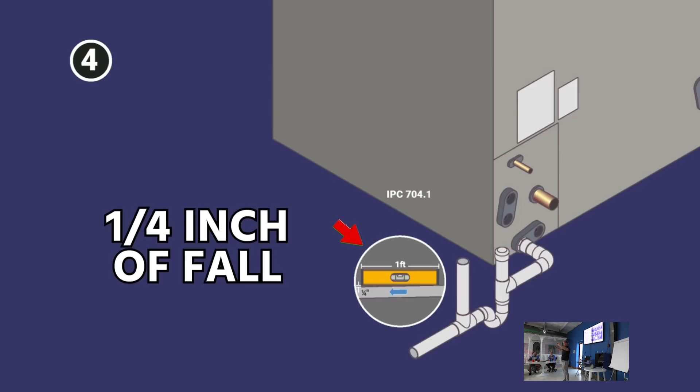Couple key points here. First of all, you need to have fall across the entire system. Everybody knows this, right? But how much fall? 1/4 inch per foot is about what you look for. Some codes in the US will say 1/8 inch per foot, but you really want to have, for every foot of run out, you want to see it drop about 1/4 inch minimum. It can be more than that.

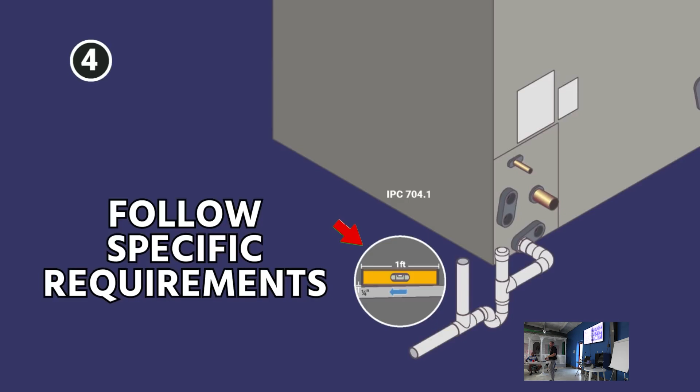Some people will talk about, oh, it could be too much. Well, that's in plumbing where you have solids. When you have solids, you could actually get too much fall where the water rushes by and the solids don't go with it. In HVAC, that's not as big of a thing because you shouldn't be crapping in the drain line. That would be a bad thing.

One of the biggest mistakes that people miss is double trapping and vents and how that all works, okay? So you want one trap and only one trap. The only time that there's an exception is if you have multiple systems going into a common drain, and then you might have more than one. You might have traps in the individual drains, and you might have one in the common drain that they connect to. That can happen. But here's a really important thing.

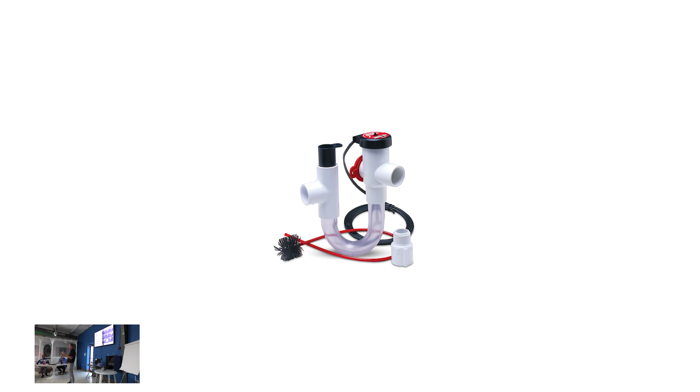Before your trap, you have a clean out. Do you guys use prefabricated traps, like EZ Traps or anything like that? Do you tend to use those? Okay, so that's built in. It's baked into the system. You got a clean out. But after that, you should really have a vent, okay?

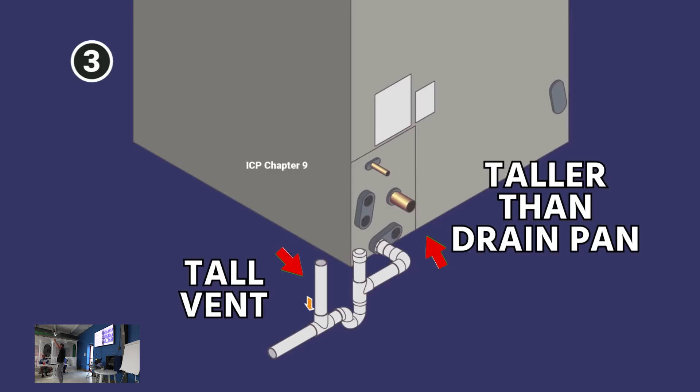And a vent is open and it stays open and it's tall enough that it gets above the drain pan, right? That's really, really important, that last part that I just said. Because if you have a vent that's not taller than the drain pan, what's going to happen when the drain backs up? It's going to overflow all over the place. If it's taller than the drain pan, it's not going to make a difference, right? And what that does is it de-risks you in case there are double traps later on.

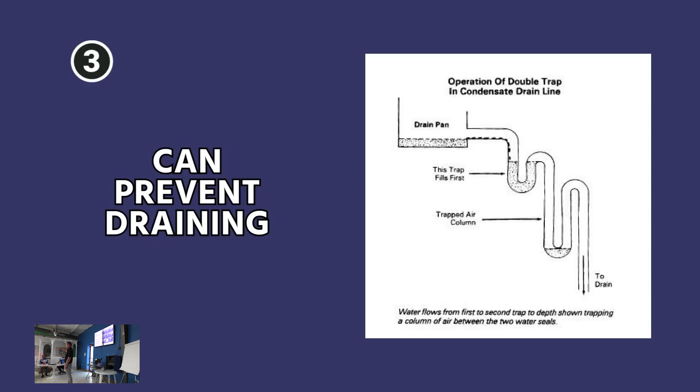Because a lot of times if you're running across an attic, for example, you may have a drain that has a long horizontal run, and it'll kind of get bellies in the drain over time. And by having that vent after the trap, it breaks that air bubble and allows it to continue to drain. Will you have drains that work without a vent? Sure, they'll work in most cases, but a vent is the best practice.

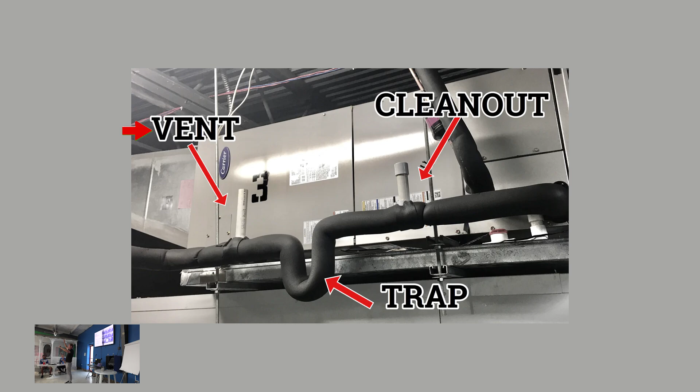You have a trap, and that trap, the outlet is lower than the inlet, right? You understand that it's not a running trap like this. Outlet's lower than inlet, and the whole thing is pitched 1/4 inch. That makes sense? So it's not level here, it's pitched 1/4 inch, and the outlet is lower than the inlet, and at the outlet you have this vent that goes nice and high. And it doesn't matter, you could pipe it all over the place, just so long as it's above and air can escape.

That's all that is. So one important thing here is that you probably don't have this problem, but a good amount of drains here go right into the plumbing. To the plumbing, there you go. Yep. Make sure that's not the case before you put a trap or a vent on it. The vent, right.

You need to have a trap, but no vent. Good point, because you don't want sewer gases escaping up that vent, right. The same thing goes for positive pressure in your handlers. Like drains, that you don't have to use a trap, right. But you need one if it's going to the plumbing.

Good point, yep, does everybody understand what he just said? That's a really key point. In Florida, that's against code, so we never run into that. But here, that's a very specific thing. If you're going into something that contains sewage, not only is it important that you don't have a vent, it's important that you always have a trap. And that trap does not ever dry out on you, right? If that trap dries out, you're going to get sewer gases coming back in.

Have you ever walked into a restaurant or a public bathroom or a public kitchen and it smells like absolute refuse? In most cases, what that is is floor drains that have dried out or they're untrapped, improperly installed, and sewer gases are coming up through, or sinks or anything like that. It is absolutely disgusting. And you can imagine that pulling right into your air handler, right into your airstream. That's disgusting. So for sure, exactly what Simon just said.

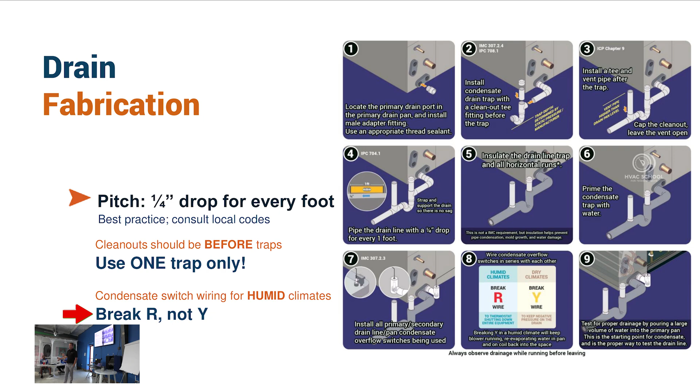I'm going to comment quickly. How do you guys shut down the equipment with float switches? Do you do it on R or Y? You do it on R. That's my preference. I prefer R. In a humid climate, we want people to know when the float switch is tripping. We don't want it to cycle. Unless it's communicating, it's supposed to break C using a relay, so we break C usually.

Yeah, and in some communicating systems, they actually have dedicated terminals for it too. So on a lot of your Bryant and Carriers, you have a dedicated terminal where you can use G, and then that will actually signal that you have a float switch opening through the actual communicating control. So it depends on the system, right? So you got to know, again, this goes back to RTFM.

You guys know what that stands for, right? RTFM. Read the fantastic manual. The manual's fantastic, so you need to read it. Right? I grew up conservative Christian. My dad told me that's what it was the whole time, so I believe him. Read the fantastic manual. Yeah, it's a fantastic manual.

In terms of the condensate switches, I'm a really big fan of redundancy, especially in cases where you have equipment in attics over top of spaces that they're potentially going to damage a lot. So make sure that you wire your switches in series with one another, not in parallel. I know that's apprentice stuff, but really important. It wires into one switch, into the next switch, so that any one switch shuts the system down. Really important, right? And having redundant pan switches and equipment switches.

And this is the way I tell people: step back from this unit. Imagine that water starts leaking everywhere. Where's it going to go? Is it going to run down the ducts? Think about where it's going to go and make sure that it's set up so it's going to get caught and it's going to shut the equipment down, right? Some of the biggest problems I see in attic units are pans that aren't big enough, they don't have enough overlap, they're not held in place, so they get bumped, the switches aren't positioned properly, all that kind of stuff is really big.

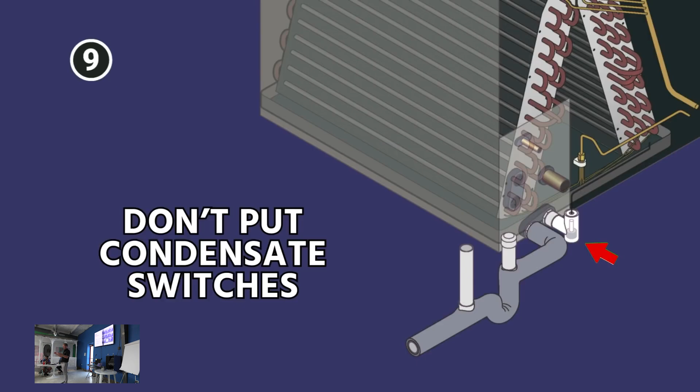Do you ever run into cases where you use condensate switches, float switches, and you sit them right out the front of the unit, just stub it right in, and then it doesn't actually raise the switch enough to even shut the unit off? Do you ever run into that? There's some pieces of equipment, and you'll know because you'll go and it's dumping water, and the switch isn't high enough. And so you have to know the equipment you work on.

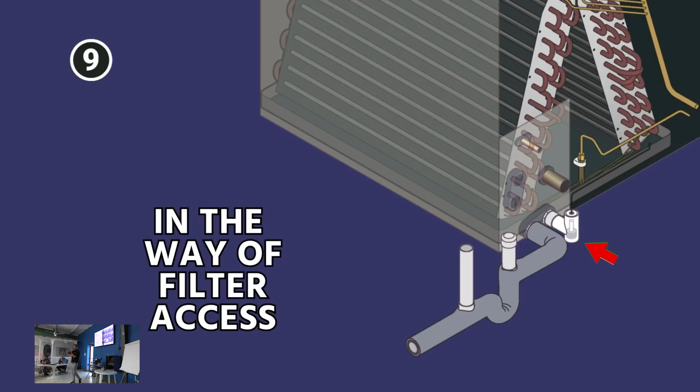There were some Lennox units, there were some Rheem units back in the day, and with the switches that we were using that just wouldn't actually raise the level. So we've taken to literally piping them around the corner, dropping them down in order to ensure that they fill with water. A lot of techs will say, well, that's a problem because the water can't get back out. Newsflash, the water's not supposed to get back out of a float switch. If the water's getting back out of a float switch, it means there's a problem.

That float switch is there to fill up with water if there's a problem and shut the system off until somebody can come find the problem and fix it. Have you ever done this or seen people who just re-pitch the float switch in order to make the unit come back on? If you're having to tip the float switch up a little bit to keep the unit running, that's a bad sign. That means something else is wrong with the equipment.

What you mentioned a while ago, we call them nuisance calls. Yeah. A lot of times, a little bit of water might go inside the switch. Right. Just tip it up a little bit. And it might run that way for years. Okay. But again, something else is happening. And usually what's happening is high static pressure on the system. So how is that related? Well, the more static pressure you have, the more turbulence there is of air. And so you actually get water that's jumping up over that dam and making it in.

Find the source. We've even had manufacturers. There was a case back in the day with a particular model of Trane coil that was just set over too far. And water would drip off of the coil after a while. It wasn't a lot, just a little bit. And we figured out how to just tip it up. It had 4 screws that attached to the top plate, so we took 2 of the screws out and put them in the place the other 2 were and brought it up just a little bit so the water would run off the slant coil.

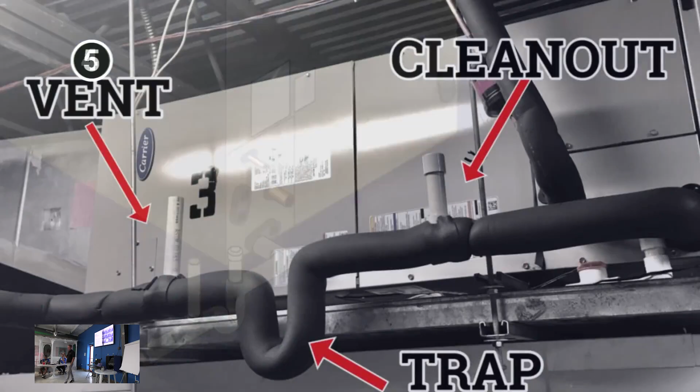Insulating horizontal runouts of your drains. You guys insulate all the horizontal portions of your drain lines here? You do? Okay. In this market, that's a really good practice. Your traps, your horizontal portions. And why horizontal and not vertical? Because in vertical, the water is falling, it's not sitting. When cold water is sitting on the horizontal portions, that's where you tend to get a lot of condensation.

And again, if it's in a space that's conditioned and humidity controlled and you don't have an issue, then okay, whatever. But if you're running it through an attic, anywhere that's unconditioned, anywhere that's not humidity controlled, you can get dripping. And you see this a lot with ductless. For years, we had contractors in our area who were installing copper drain lines for ductless systems with pumps and just running them through attics.

Well, over time, the suckers just drip. The drip, drip, drip, and eventually you'll get a stain or you'll get mold growing or whatever. I mean, it's one of those things that doesn't show up right away. It takes a while, and so it's just a good best practice to insulate any horizontal runouts of drain in unconditioned spaces. Drain fabrication, again, these are code things, so I'll reference things that are codes and all this,

but one thing I see a lot of here is really poor line set covers, really poor sealing, and that can be a big factor, especially in the envelope. And again, you want to address issues that aren't just today's issues, but are going to cause damage over the next 10 years. When I'm looking around a lot of the buildings, I see a lot of line sets just coming out of holes in the wall, just open.

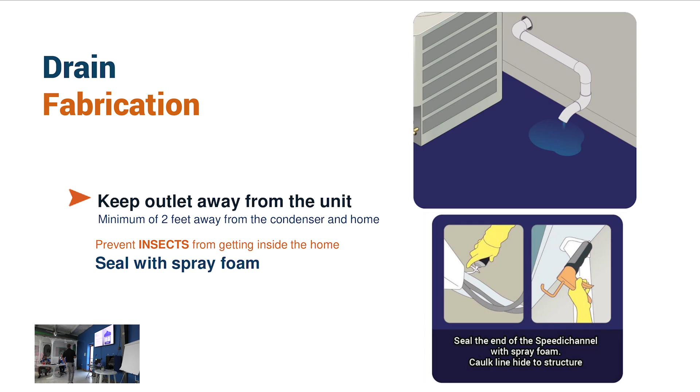And for you guys, I'm going to focus a lot on how to prevent and solve mold and moisture issues, because it's not about, I mean, it's aesthetics, like it looks nicer, but I'm focused more on how do you actually address and prevent problems that are going to come in the long run. And so these are things that can be helpful. Also, trying to get condensate away from the building a little bit is just a good best practice, because a lot of times it does make it back up into the structure, and it can wick back up into those outdoor wall systems. Insects also, it's another good reason to keep things sealed. We already talked about a lot of this.

Anytime you're going to install a system in a downflow or a side flow application, you need to have read the installation manual and specifically looked at the information about this, right? I would encourage you to really make that a practice, because in a lot of cases, side flow right, side flow left actually makes a difference with how you have to set up the equipment. You have to swap things around. You have to move things. You got shields. You got the little hoses. You got all these different seal kits for downflow, whatever.

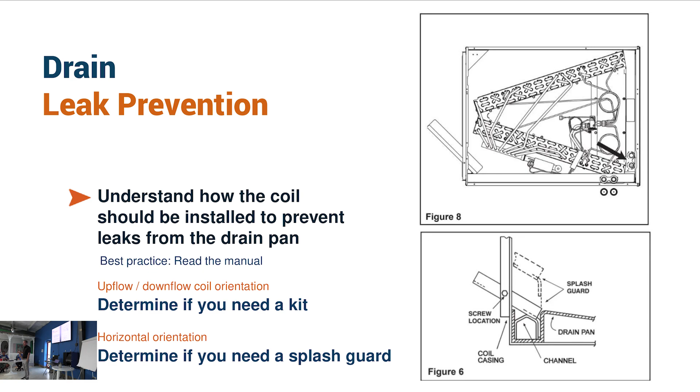Anytime you run into cases where it's abnormal from what you're normally doing, stop, pull up the manual, and look at what it has to say about this. Because a lot of people say, well, yeah, but can't you teach me how to do it? Well, yeah, it depends on the model. It depends on the specific unit you're working on. So anything you guys run into, go ahead, Matt. So some of the coils I've been putting in recently, it says if it's a high humidity environment, you need to order this extra kit. Right.

And it's like 3 different splash guards for the 3 different layers of the coil. Yeah, that's in the guide. Right, the accessory guides. Always pay attention, especially if you're going to take on a new line. And again, I have not been perfect about this, but if you're going to install a new model or take on a new line, read through and pay attention to the accessories and the applications for those accessories. Because if it needs an accessory, it's really helpful to get that ordered beforehand.

Go ahead, Brett. I'm just curious, what equipment is that? That's good. Yeah, Daikin, all the same. And you guys do primarily Bryant, is that right? Bryant, okay. Yeah, and again, you're gonna see all different types. So it's good to pay attention.

But again, whenever you're running into it, it sounds so basic, but people ask me all the time, how did you learn all this stuff? I just read manuals. I ran into a problem, pulled up the manual, read it, and now you know it. And it really is that simple in a lot of cases. So when you're running into weird condensation issues where we come back 3 times, the insulation's saturated, I don't know where the water's coming from, one of the first things you need to do is stop and ask, are there accessories that were supposed to come with this unit? Were the proper configurations made for the application it's in?